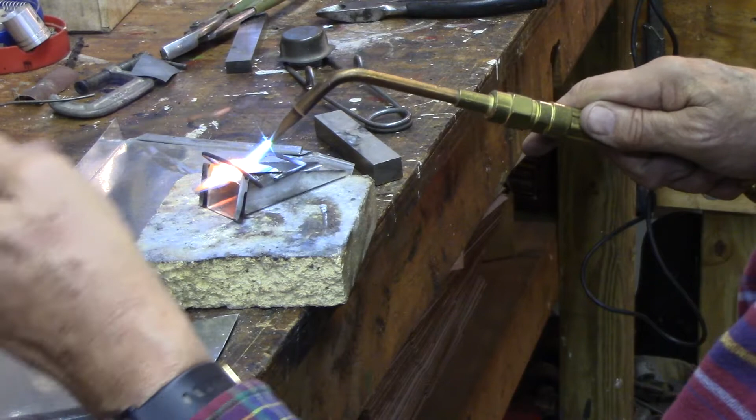Alright, so we've got these guys all brazed up. The next step is to drill.

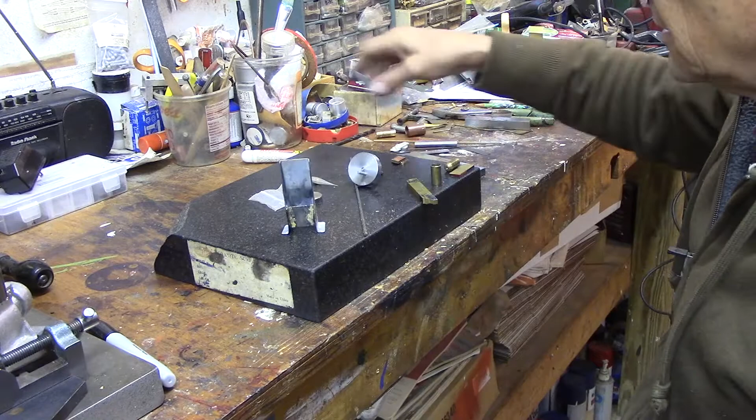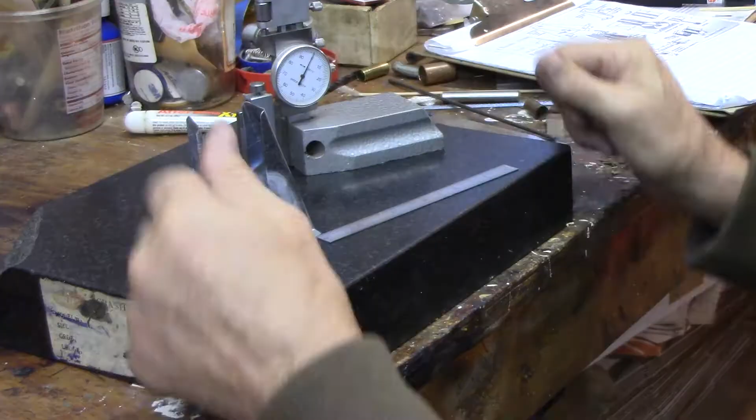This shows 7/8, that's 875 thousandths. This hole has no dimension, so I'm just going to have to wing it. I'm going to zero out the height gauge and then put 875 on it, which is 7/8. It's not real critical as long as the flywheel clears the bottom. Maybe I ought to check that. Again, I'm just going to stick to the article and see how it turns out.

7/8 and below the 9. Get it close like that, see, and then tighten up the vernier. Bring it up to 875. Once you use these a little bit, they're actually quite easy to use.

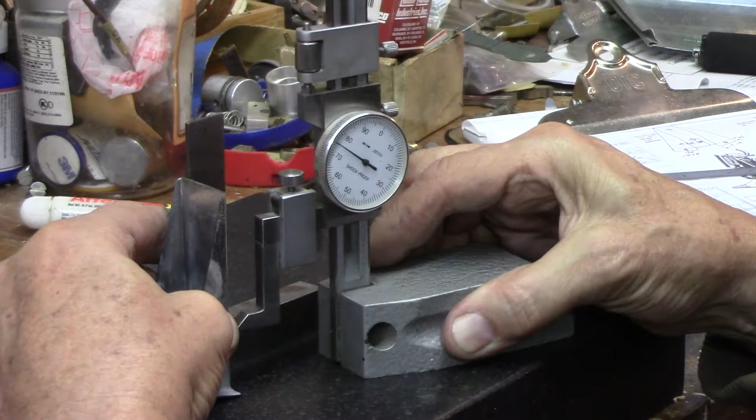Mark a line across there, and then the next thing I'm going to do is mark a center line. Neither one of these came out at exactly an inch. This one's close, but when you take in the bends of the metal and the thickness of the metal on each side, it's more than an inch from here to here. If you just measure it based on an inch, it's going to look funny because it won't be in the center of this whole assembly.

I use it for everything. It says permanent marker, and as long as you keep it away from alcohol, it is permanent. But you can get it off your fingers, or off somewhere you don't want it to be, with denatured alcohol.

Alright, now let's lay this thing over on its side. Here's my super duper parallels, which are there. So, 1.283 -- that's going to be the halfway point of it. Alright, I got the two center lines drawn.

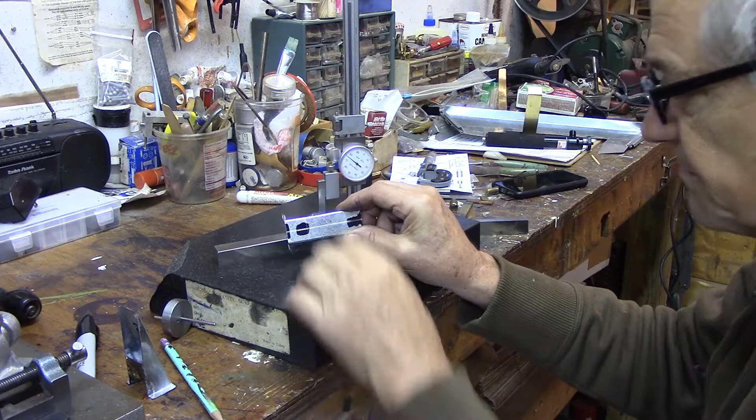The second one came out a lot closer than the first one did. So you flip it over and do the other side, and the lines aren't together. So you just put your drill bit in the middle between those two lines. It's actually another way of finding center -- come into where you think it's as close as possible, flip it over, do another line, and between that line is where the center is. So this thing, I made a discovery -- this thing is off by 3 thou. But I got it done, and then we'll go over and drill.

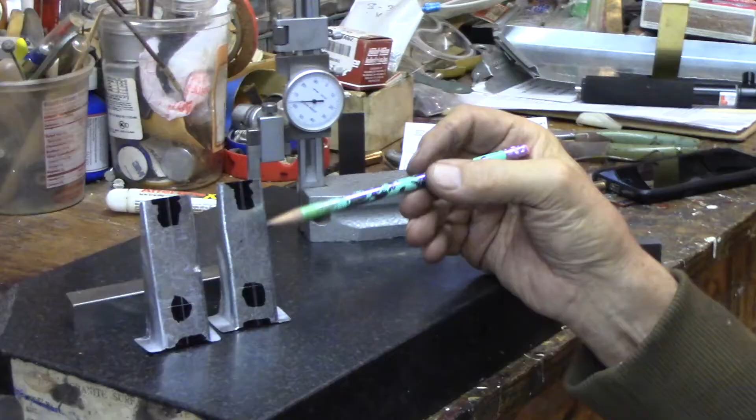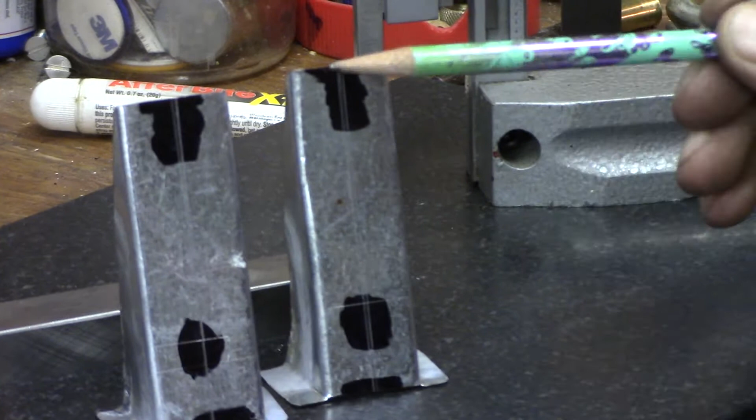Before I drill, actually, I'm going to mark these holes here. I'm going to decide where those go and mark the upper holes. I need a 3/16 hole here and a 3/16 hole here, so I'll mark them and punch them. And then we'll drill them over on the Enco mill.

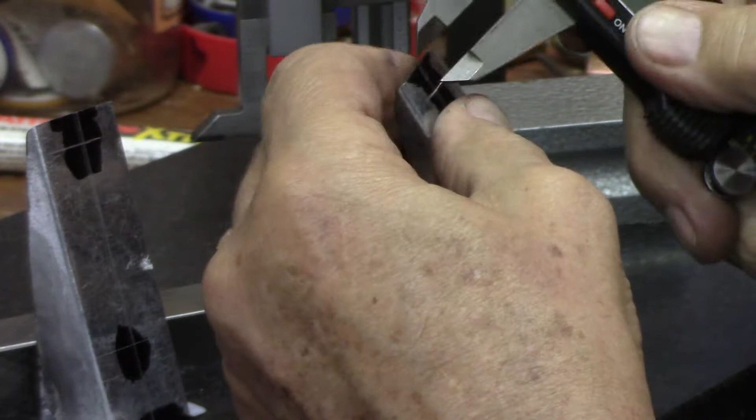Alright, based on my brilliant deduction here, I think this hole is about 300 thou down from the top. So I've marked it on my calipers, and I've etched a line at 300 thou below that. I think that's in the ballpark.

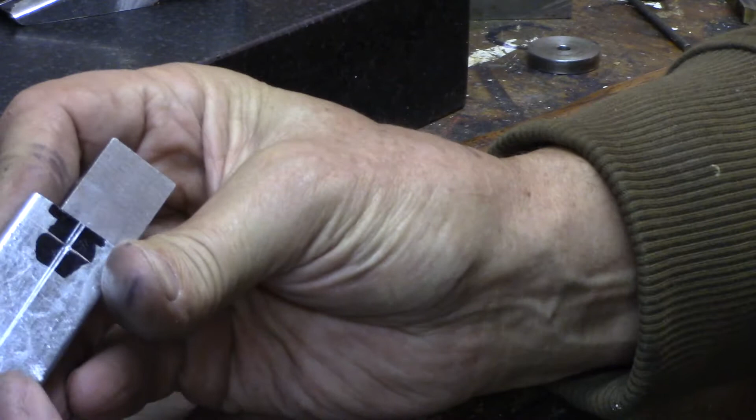I just move this along the line until it stops on that other line. If you get a good scribe line, it'll stop. A nice, delicate, small punch will just stop on the cross line. You don't even have to look, you can feel it. And then hit your punch. You can do it very quickly, very accurately.

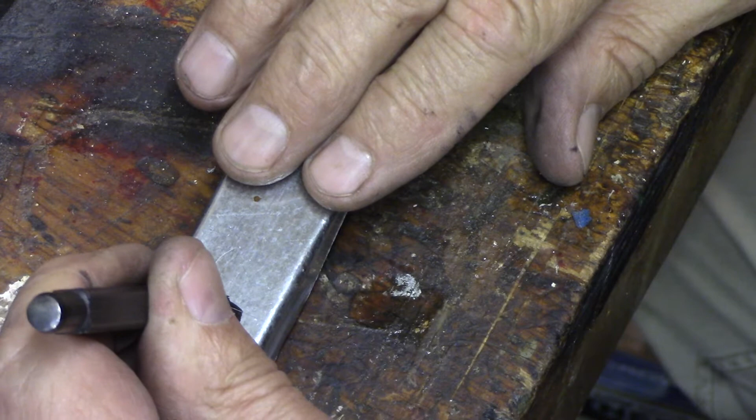You can see those came out dead on. There's that 3/1000th mistake. I can still move this along here till it just stops right on that cross line. Boom. Perfect.

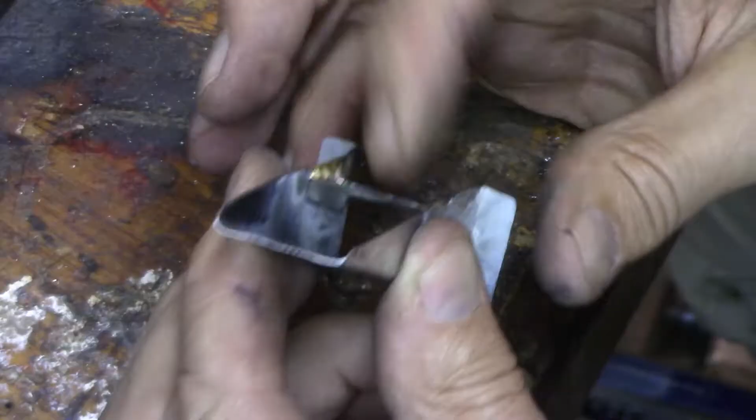These are marked. We'll take them over to the mill and drill all the way through, drilling through both pieces -- this one and this one.

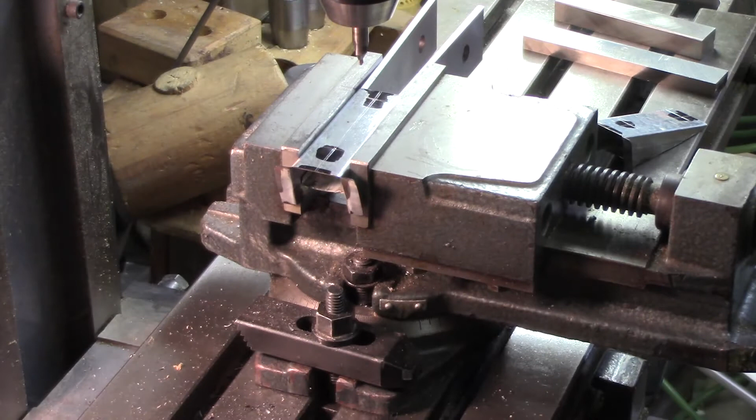Okay, I have the frame, the engine frame, mounted on 1.25 inch parallels. A center drill here to start these holes. The distance between the two holes, you could just dial that in. You could do it with your hand wheels, or with CNC you could just set it in your program and have it do it.

We don't know because there's nothing on the plan, so we just hope it's right -- as long as the flywheel clears the ground, or the base. Let's see if it's in the center, see if it looks like it. Looks pretty good, I'll make a little adjustment on it.

Alright, that's good. Now, while I have it in the setup, I'm going to go ahead and go all the way through to the back plate. Got a nice sharp drill bit. Center it up right over this hole.

Oh! What the hey, something isn't right. Must have a chip in there. No, that drill bit's bent. What's that doing in my box? New drill bit.

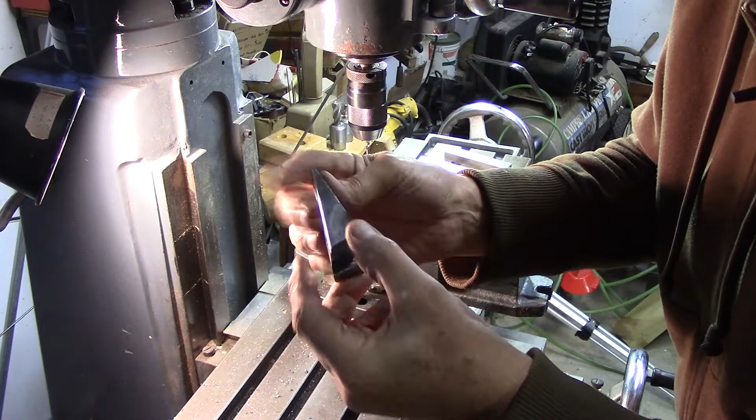I marked that number 2 so I know which parts are what, because number 1 was a little smaller.

Now the fun part is I can go and see how the flywheel is going to look in there, just for fun.

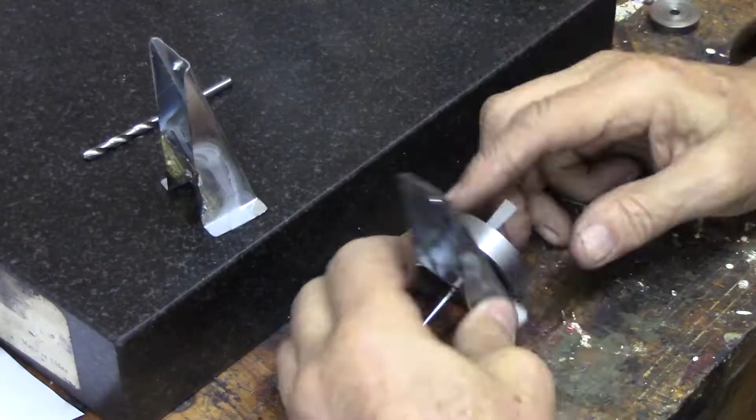Alright, it's going to work. It clears, got plenty of clearance here. Just a little worried about that.

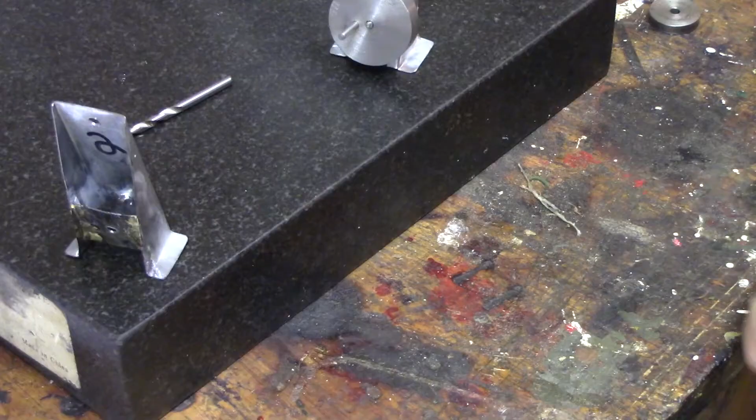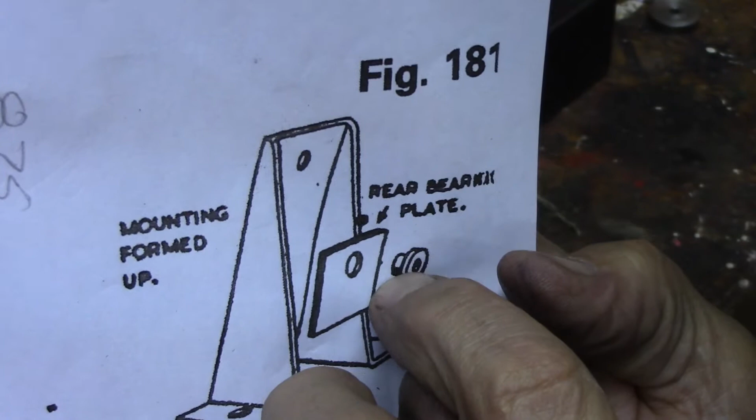It worked, we're done on that. The next step is to make these little bushings. I'm going to make them 3/8 by 3/16 with a 1/8 inch hole in the middle, and maybe a 1/4 inch wide. All it says here is bearings, 2. It doesn't have any dimensions on it whatsoever.

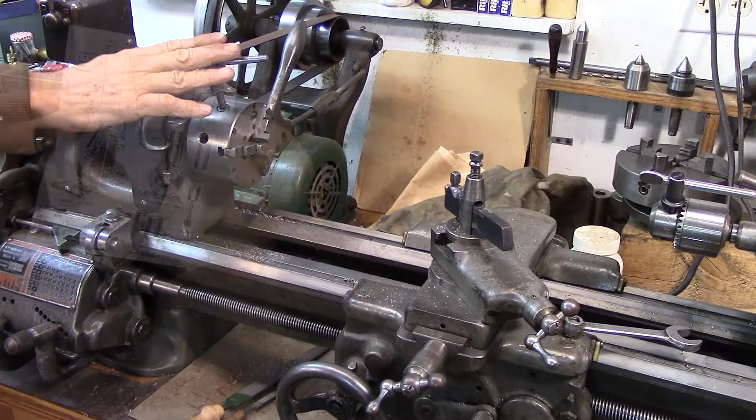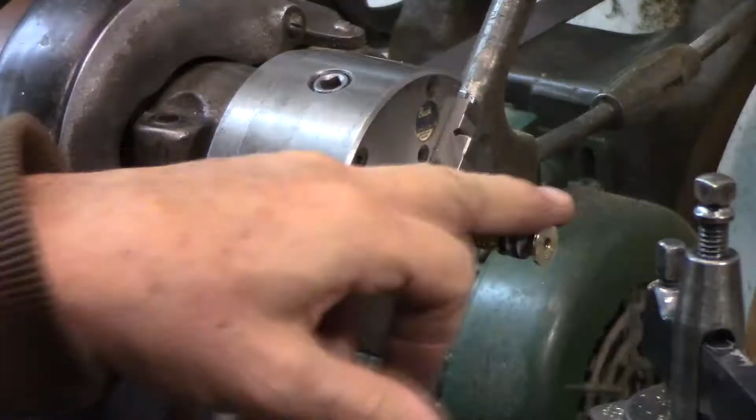Okay, we're back over at the South Bend, and I needed a piece of 3/8 inch brass or bronze to make those. I found this bathtub faucet control, and it's 3/8 inch, so I'm going to use it to make 4 of these. First I have to clean it up to 3/8, then mark it 1, 2, 3, 4. Main stem of this thing measures 375, 3/8 inch, so it's right what I need. Just using high-speed steel on this. Brass is pretty easy to cut.

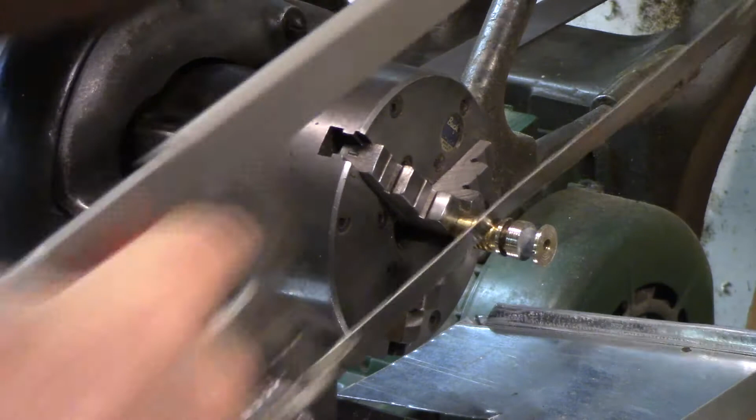I'll just cut this off right about here. We'll do that with the hacksaw. Oh gosh, that's dull, oh my gosh. That one's dull. Get another one, it's a little better. It is cutting. Oh, why fight it?

I converted my old bandsaw through an article in Home Shop Machinist. I converted my bandsaw to cut metal, so I'm going to run over there and just slice this off. I'll be back in a minute.

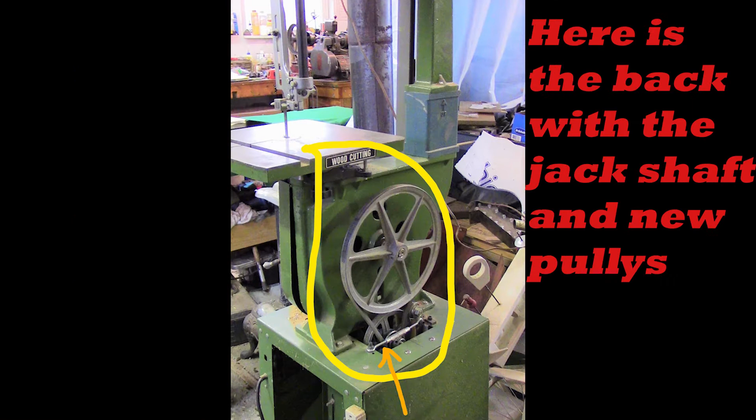Alright, that was easy. So I'm just going to bring these threads down to 3/8 of an inch, and then I'm going to flip this over and use this side, 3/8 of an inch and then 1/4 inch. Zoom, zoom, zoom, zoom, here we go. Now you can see it much better.

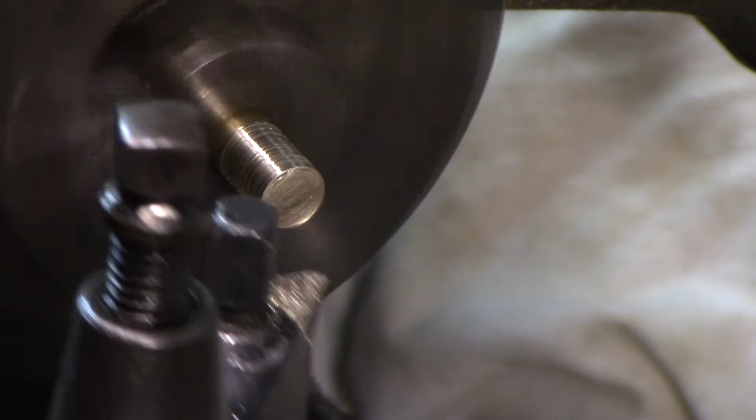I'm going to face off the front now.

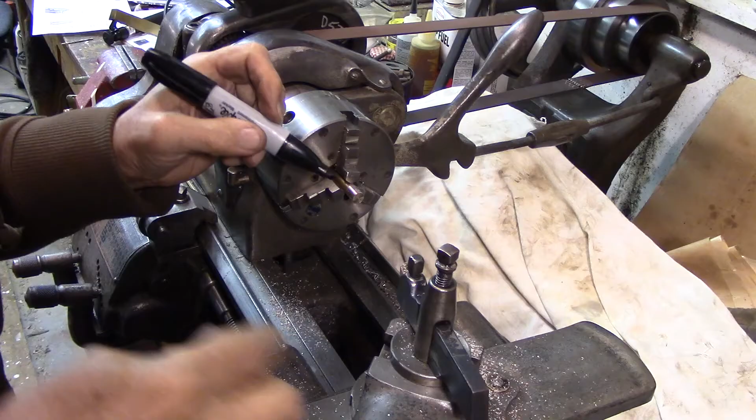Alright, now I want to mark off 3/32 or something for the wide part. Okay, so I've turned this, marked it at 3/32. Probably going to make use of my carriage stop here. I'm going to zero it out. Alright, we're going for a 1/4. So either that's 250 right there. That's it, that's done. Alright, that one's done.

I'll just come back in and clean up the back, and I'll do all those at once. Clean up the back and drill the hole. So this takes up a lot less material on the saw than the cutoff tool would too. So let's do the next one.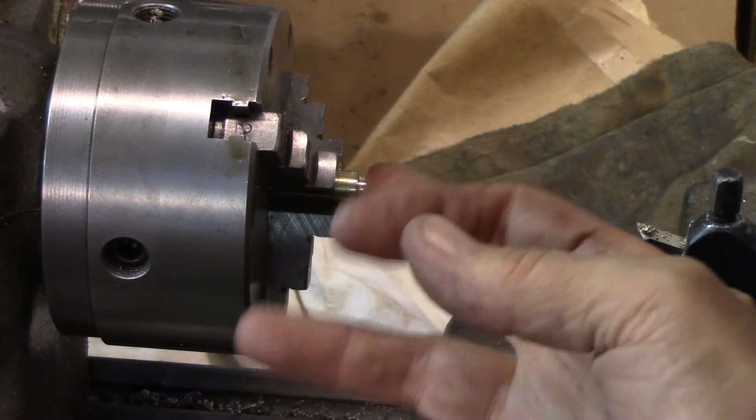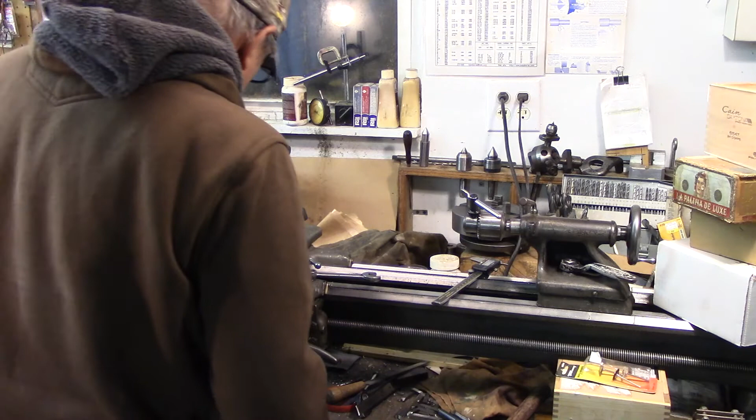Alright, take this over and cut it off. That'll be 2. Alright, 1, 2, 3, 4. The next step is I'm going to spin these around and put them in the chuck on the other side.

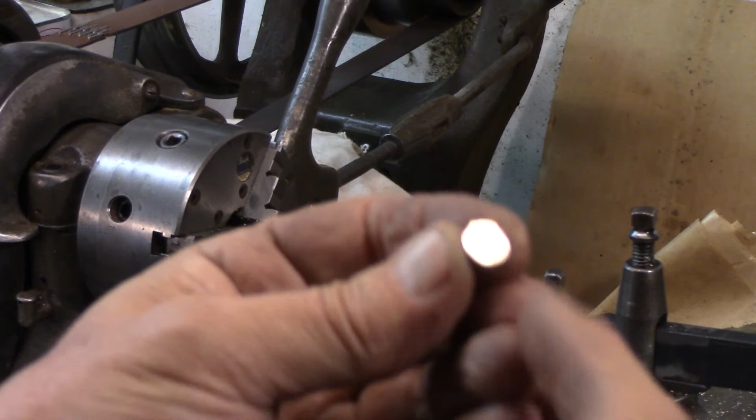Face off the rough saw, and then size them to 3/32.

Here we go, just going to drill this. Get a center drill in the chuck. Okay, I brought up the tailstock, lock it down, just going to center drill this. I'm holding this on this little teeny stub there. That's all that needs.

Put a .120 drill bit in there. Drill bits tend to go oversized for any number of reasons, one is it may not be too sharp, another is you may not have it clamped right. This chuck right now I only have it dialed into maybe 3 to 5 thousandths. You just chuck a piece up in there, you only get it's going to be out a little bit, so it's going to drill a little oversized. That's why I use a much smaller drill bit, a 5 thousandths smaller drill bit, and then come in with a reamer and ream it accurately.

This one will go all the way through. That was easy.

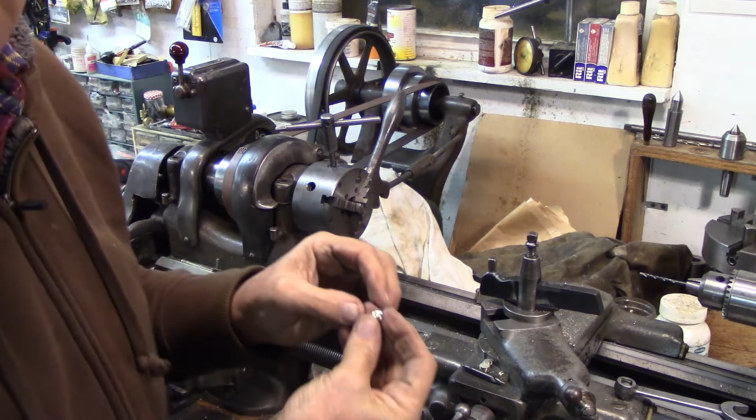There it is, grab the reamer and the 1/8 inch reaming bit. You can get these that are a thousandth over or a thousandth under if you're really getting into precise work.

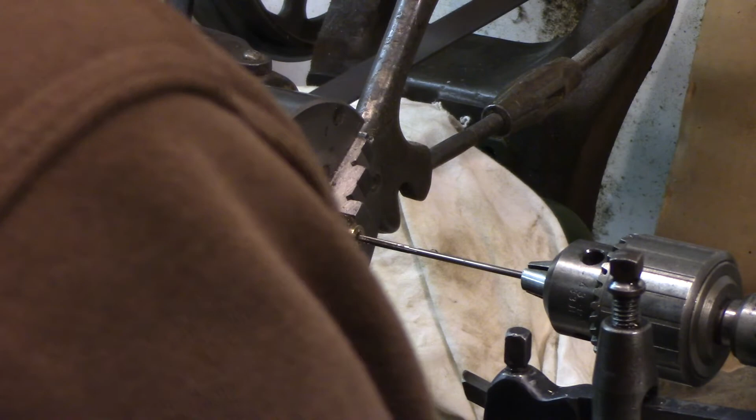That's it. Alright, that one's done. So just to go back to show what I'm doing here, I'm making the bushings.

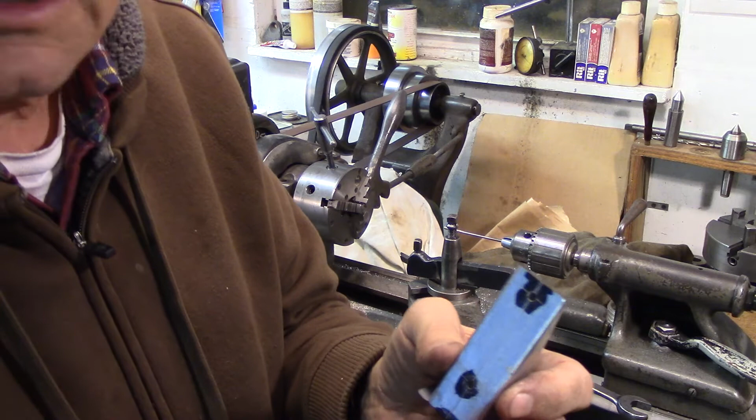So one of these bushings goes on the front and one goes on the back. That's the picture of the bushing, and there it is, this is the real deal. Looks pretty close.

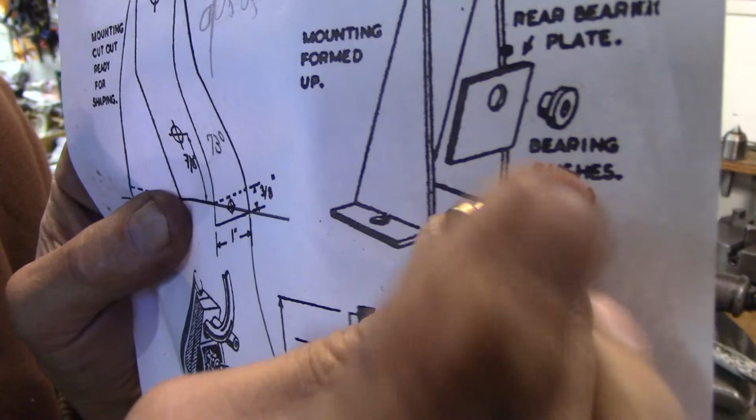Now, one thing I can check here, here's the makeshift crankshaft. That's a pretty good fit.

Alright, I just have 3 more to do. And actually as I make them, it goes quicker and quicker.

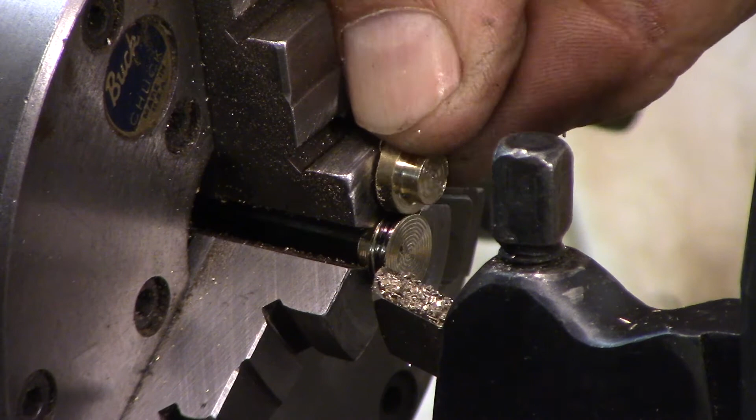I'm going to use the finished one as a marker, as a gauge to see if I have to go any further. It's an eensy bit, so let's knock it back.

Okay, that's measuring good, and I'm just going to touch it with a file real quick. This file has no edge, a smooth edge, so if I hit my jaw, hit my chuck, I don't ruin the jaws. Yeah, that's salvageable, that's alright.

The carriage stop's up against the stop. So I take one that I finished, that's closest to 93, this one. Ooh, that's a close-up shot, isn't it? And measure it. Oh yeah, that looks good. You can see it's right there. This thing's in the way.

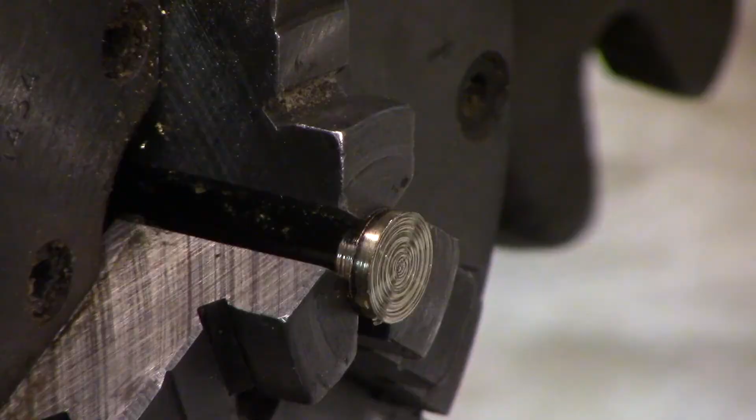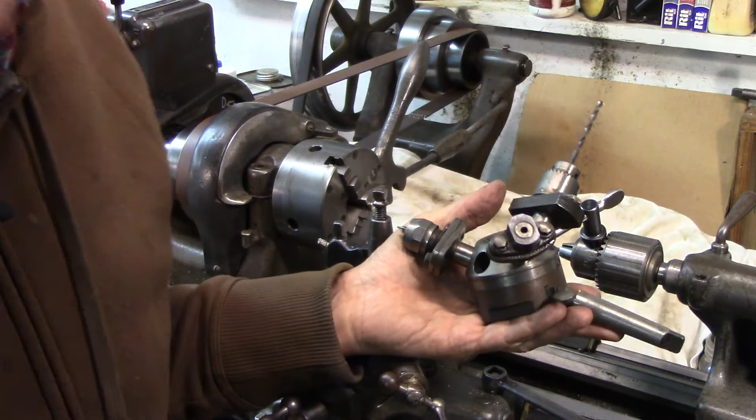Next step is to drill, drill and ream. If you're making a production of these, say 100 of them, you can put this in the tailstock, this little turret, and have the drill, the center drill, and the reamer, and you just click it through. It has a little release, and zzz, that's handy.

These are, when you find these at the shows, you know, it's pretty expensive. I think that was like $135. Even these things, the little holders, I don't know the proper name for these, but they fit in the holes, and they have different ones that do different functions. But they're like $35, $45 a piece just for the little holder thing.

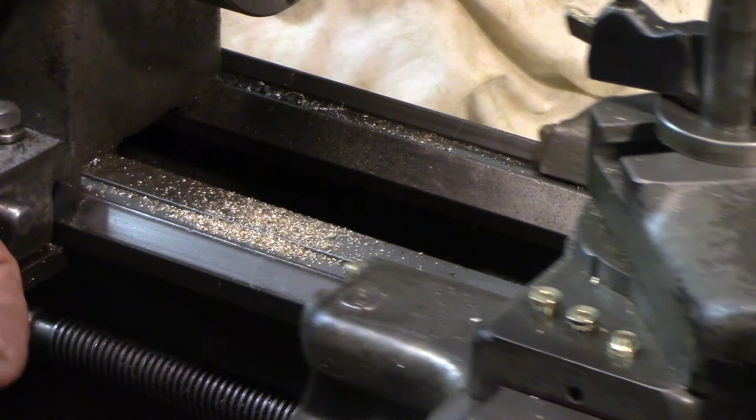All right, look at that. I have to do all this camera stuff. I have these done by now, 1, 2, 3. Yeah, about 20 minutes ago my battery died. Then I had to run in the house, get the charger for the camera and bring it back out. I only have one battery. This is a small budget operation, to be sure.

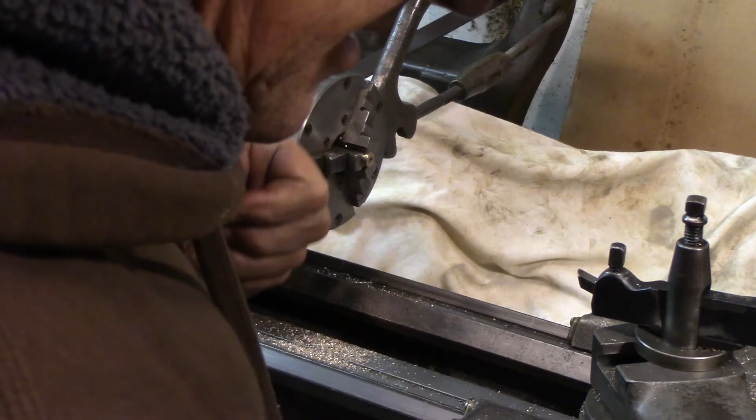That's it. Look at that puppy. 1, 2, 3, 4.